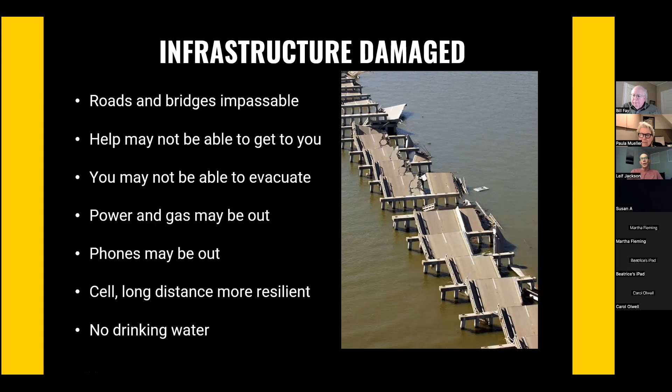And then utilities will be out, water, power, gas. So the things that we are used to relying on a day-to-day basis, we won't be able to. As far as rescue, the same things that are affecting us, the roads being impassable and airports being down, of course will affect rescuers as well. So expecting rescue or even emergency supplies to get parachuted in the next day is unrealistic. Bill talked about having 2 weeks of supplies. I think that's a good minimum. Things will not be back to normal after 2 weeks, but perhaps we'll have a better, more coordinated emergency response by then. And then, of course, I'm talking about retrofitting homes and helping to keep them intact in an earthquake.

So if your home is not livable after an earthquake, where will you shelter? In Hurricane Katrina, it was the New Orleans Superdome, which was overcrowded. There were talks of assaults and rapes occurring. The toilets were not working. There was garbage piled up. It sounded like a pretty miserable place to be. So I would say that if you have any control over your likelihood of being in your own home versus a shelter, do everything you can to spend time in your own home.

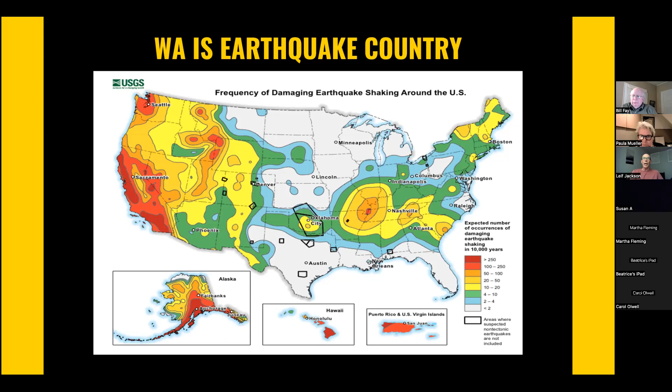And why do we have all those earthquakes? I think we all understand it's because of plate tectonics. In the middle of the Pacific, there are a couple of plates, new earth being formed out of magma and the plates spreading. So underneath the Eastern Pacific is the Juan de Fuca plate moving our way and riding under

the North American plate. And it doesn't just move smoothly. It moves in fits and starts. It kind of grips and causes some pressure and friction to build up and then lets loose all at once. And it can let loose in 3 different ways. And that causes 3 different kinds of earthquakes.

And the one that we've experienced a few of would be a deep slab event. And that occurs, if you can see my cursor here, sort of underneath the crust of the earth, but not necessarily right where the plates are riding together. It has to do with cracking of the Juan de Fuca plate and just sort of a release of pressure there.

And what we think of as the big earthquakes that we've experienced are really not big in the grand scheme of things. We get 2 other types of earthquakes that are going to be much more destructive. Everybody has heard the term the Cascadia subduction zone, and that's when pressure is released all at once right along the actual fault where the plates come together.

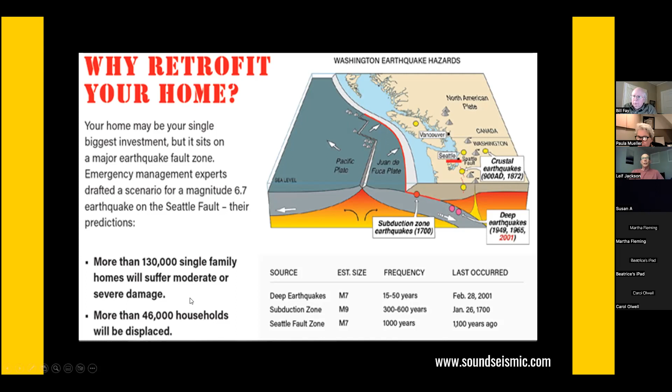We're going to come back to some of these numbers. On the left here, there's information from CREW, the Cascadia Region Earthquake Workgroup, a bunch of disaster preparedness, emergency management professionals and geologists, who got together to use science to figure out what things will really look like after a Seattle fault zone earthquake, and the structural damage will be severe. So we're going to talk about these 3 different types of earthquakes, in order of how frequently they occur, which is also least to most worrisome, least to most destructive.

A lot of us were here for Nisqually in 2001. And occasionally I get homeowners who tell me, my home has been through 3 big earthquakes, so I probably don't need retrofitting. And I try to gently correct them and let them know that their home has been through 3 moderate earthquakes. They're right that there was one in '49 and one in 1965, and then Nisqually in 2001, and those were all a little bit less than a magnitude 7. And our homes survived them almost 100%. And that's great, because that's the frequency and the severity that we can expect.

And this photo here is from Nisqually. I think these are homes in West Seattle. And you can see, while they're brick veneer, these are wood framed homes, just like most of our Queen Anne homes. And really all the damage is that the chimneys failed. So I think we got very lucky. We should not be nonchalant just because we've survived that type of earthquake, though.

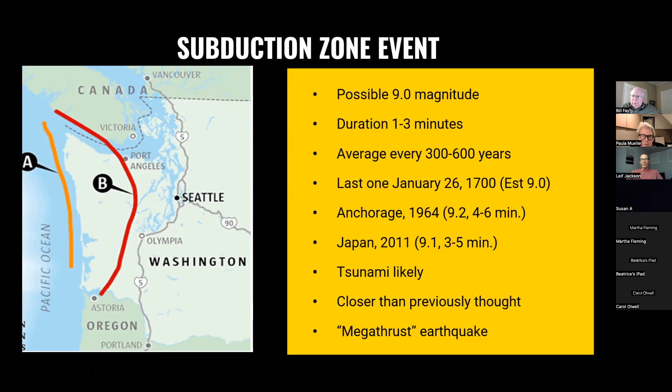This earthquake, the Cascadia subduction zone event, got a lot of press in 2015, 2016, when the New Yorker published an article, and it won a Pulitzer Prize because it had great science behind it. But it was also a little overdone, and some of you may recall some of the overly dramatic language in it. But it was really effective at motivating people through fear to act and become more prepared. And so I did send Kathryn Schulz, the author, a thank you note for helping Seattle and the Northwest raise the awareness here and help us get motivated to become prepared.

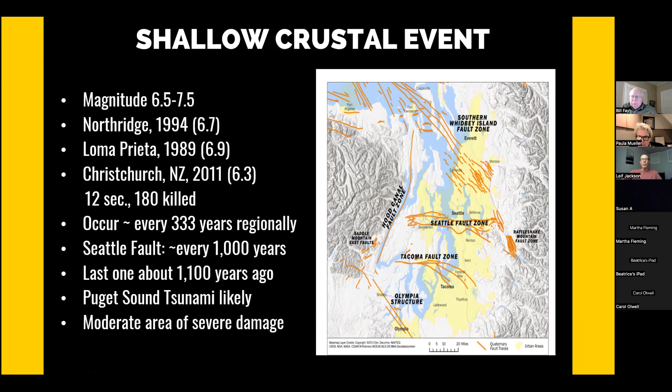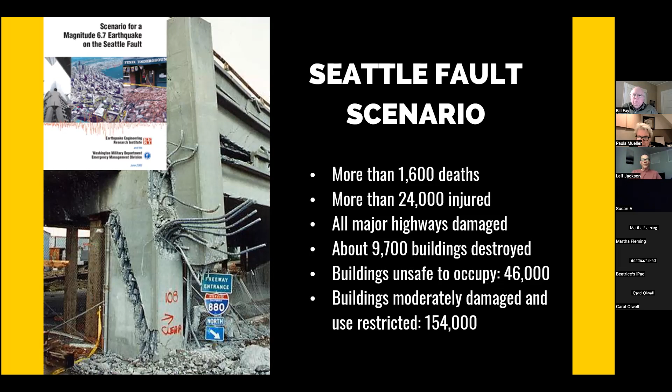So that's pretty striking. The effect on buildings, and that's something that we can totally control. We have the technology to prevent that kind of damage. So, regarding our homes, on Queen Anne we have a lot of homes that were built between 1900 and 1940. And I guess the bad news is that building code didn't require anchor bolts until 1965. Plywood wasn't really used until after that. And so most of our homes were built without earthquakes in mind. The building code just didn't think about them.

The good news is that even though that's true, our wood framed homes perform pretty well in most ways. Single family wood framed homes are one of the two best performing types of buildings. The other one are skyscrapers, which of course are engineered to resist the forces and have things like vibration dampening systems and counterbalances to take care of all those forces. We don't have that. It's just kind of dumb luck that the nature of wood construction and nailed wood to wood connections is this lucky combination of strong and a little bit flexible. And it works in most ways.

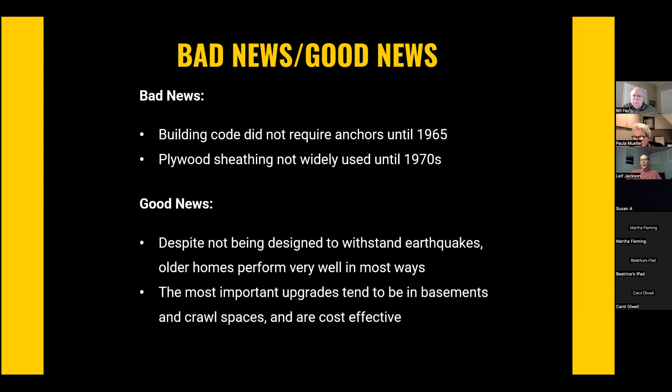In most ways, I say, the lowest level of the home where the force aggregates tends to be the most vulnerable. So it's also good news that the weakest points tend to be in basements and crawl spaces, and those tend to be the easiest to access. And it's a fairly limited scope of work.

This is more Bill's area. We should be prepared in more ways than just retrofitting. You should have a plan for what you're going to do when an earthquake hits. You should build a kit. The old rule used to be 3 days, 3 ways. I think Bill's rule of 2 weeks is a much better standard. And then, getting involved in the communication hub or Seattle's program called SNAP, Seattle Neighborhoods Actively Prepare, or getting certified as a rescue technician. Those are all ways to prepare and make it so that we can rely on one another.

And when you put a kit together, there's a lot more than just food and water that needs to be in there. There are a lot of great resources on here, but things to think about are shoes. They say you should have a pair of shoes upside down under your bed so that you can grab them quickly. And if a window breaks right next to your bed, they're not going to be full of glass, right? Seems pretty easy. If you have kids, diapers, feminine products, garbage bags to put all those in. These are things you may not think about, but they're really easy to put together and have prepared.

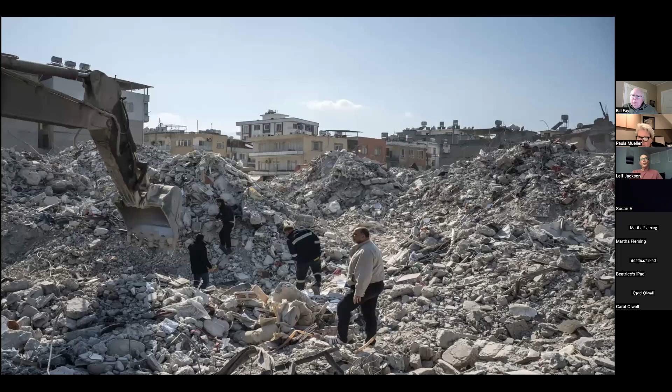And here's a photo from Turkey. This is just in the last 2 weeks. And you can see that some of the buildings were reduced to absolute rubble. They pancaked, and they just came down one level after another, and they are nothing but rubble. There are no air pockets in there. But what's striking is that there are buildings in the background that look pretty much entirely intact.

And what could the difference possibly be? Is it that the earthquake was more violent here than it was a block away? I don't think so. It's that some of these buildings were built to code with the elements built into them or added to them as part of a retrofit that we know makes homes safer, and some weren't. So it can and does make a difference. And you could probably hear the passion in my voice. I think this is a preventable tragedy.

Now we're going to the California homes. These are older photos. You can see this one's black and white. This is, I think, Northridge in 94 or 95. And you can see, like my little line drawing from a couple of slides ago, that bottom layer sort of buckled. This one, right below the first floor framing, everything above it is intact. Everything below it buckled, and that house is like 2 feet over and 2 feet to the left of where it started. And it's a black and white photo, so you can't tell, but that's a red tag. That means that those homeowners are not allowed into the home.

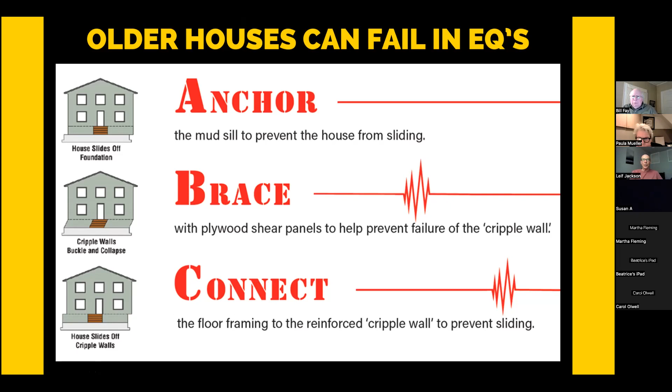So that's kind of the ABCs of retrofitting. It conveniently turns into an actual little alliterative thing with ABC: anchor, brace, connect. So we're going to talk about those in order. Anchoring, a lot of people understand that retrofitting has to do with bolting houses to their foundations, and it does, but that's not all. So where there's room, the way we bolt is we actually drill straight down through the framing,

drill into the concrete, and install bolts. Or what my company uses is these big concrete screws. There are other anchors that are a little easier to install and cheaper, but they're also weaker. So this is kind of my standard. But if you're familiar with concrete wedge anchors or wedge-alls, or epoxy anchors, those are also allowed. We just like these screw anchors because they're so much stronger.

But you can see the size of our tools. This is an impact driver that we use to actually spin these screws into the concrete. The tool that we use to drill into the concrete is even taller than this. So we need a certain amount of room directly above where we're trying to fasten for these vertical bolts to work. Where we don't have room, and here's a house with no cripple wall at all, there's obviously no room to drill vertically here above the sill plate.

The alternative are these side anchor plates. Simpson Strong-Tie is the company that makes all of these, and they work with us retrofitters, and they've come up with hardware that fits our needs. This one in particular is designed because a lot of us have a 2x4 sill, which is 3.5 inches wide, sitting on a 6-inch concrete foundation. That leaves 2.5 inches here. This hardware is designed to reach 2.5 inches and accommodate that setback. So that's the URFP, the Universal Retrofit Plate.

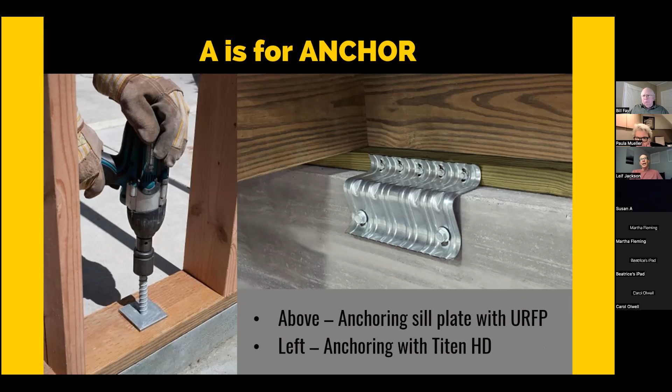So that's anchoring. Another thing tied into anchoring is, mostly we're trying to prevent sliding of the framing on the foundation. But if we have tall walls, or short lengths of walls, the geometry of those wall sections can actually cause them to try to lift up at the corners. And that vertical overturning force, we resist differently.

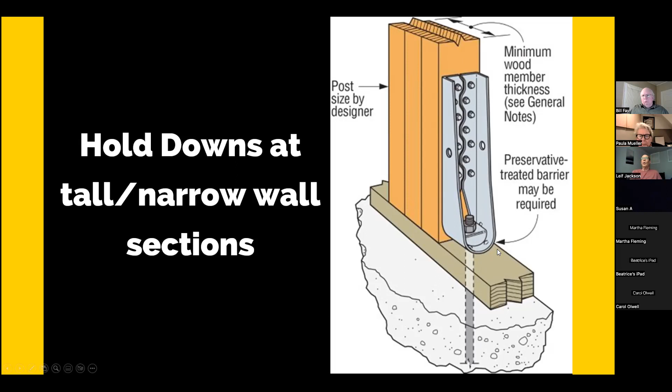We've got these hold downs that, instead of just fastening to the sill, fasten into the studs, or a built up post of many studs. And they anchor more deeply into the foundation in a way that resists withdrawal and uplift. So hold downs and anchor bolts or anchor plates would be the A part of the ABC. The B has to do with plywood bracing.

There are a few other ways of doing it when we have to, but for the most part, the easiest way to stiffen walls is not diagonal braces, it's not steel frames, it's putting plywood on the wall. Plywood is so much stronger than the shiplap boards that most of our older homes have. But plywood is really effective if it's done right. There are just so many things that need to be right for it to be truly effective.

It needs to be the right kind of plywood, structurally rated. Needs to be the right kind of nails, which are called shear nails, which are thicker wire nails than most. The nail spacing is critical. You can see a lot of nails around the perimeter of each plywood panel. Even here, where two pieces of plywood come together, for those to work as one shear panel, we actually need to double up the stud behind there. So there are two 2x4s that are nailed together. And those two 2x4s allow us to put this many nails into it without splintering the wood.

The way we cut the plywood, we can't have any overcuts if there's an inside corner. That can cause a weak place for the plywood to start to tear when it's put under stress. So again, there are a lot of things to mess up, but if it's done right, shear panels are very, very effective at strengthening these cripple walls or pony walls. Cripple wall and pony wall are synonymous terms for this wall above the foundation and below the joists.

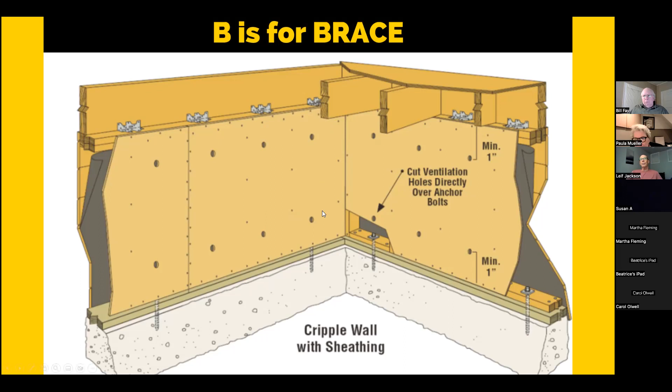And then connect. We know that there's a weak connection where the joists rest on either the cripple wall or the sill plate that they're built on. So there's hardware and a couple other ways of making a very effective connection between the joists and what they rest on. If we do those three things, anchor, brace, connect, our homes are going to be much, much safer.

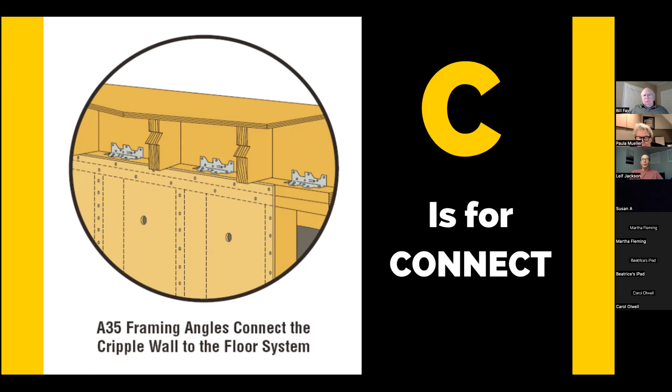The final two things are not really structural things, but we want to make sure that the water heater's strapped with straps that are made for water heaters and strapped to the framing, and that the space behind the water heater is filled if it's not right up against the foundation or the framing, so that it has no room to move.

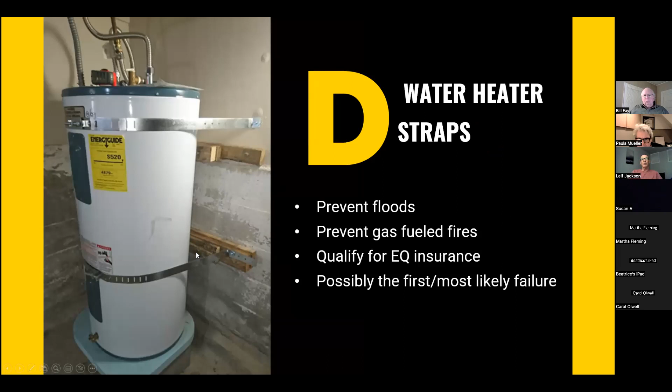Another thing that most of our clients opt for is what's called a Northridge valve. It's an earthquake actuated shutoff at the gas meter. Senses motion, automatically shuts the gas off so that you can't have a gas fueled fire or an explosion.

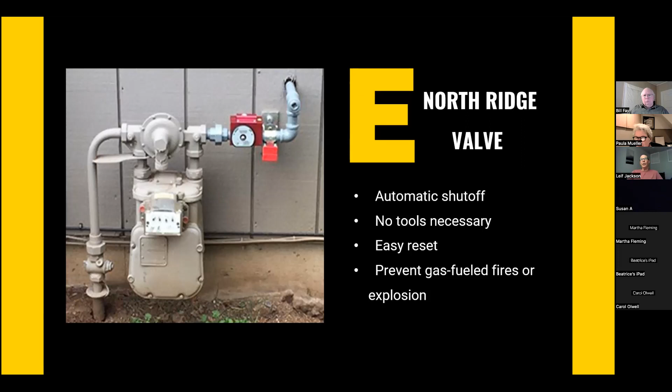Here are some things that apply to retrofits. We always need a building permit, and that's in Seattle and Shoreline and every jurisdiction around here. There are two ways to get a building permit. We can always have a structural engineer design a retrofit and do the calculations and specify the bolt spacing. There is a project, PI stands for Project Impact. That's a prescriptively engineered plan that fits some homes.

And so people wonder what the permit costs. If you're able to use that Project Impact plan, it's about $200. It's more like $500 if you're getting an engineered plan permitted. You could usually do that online. No longer need to go downtown to submit your applications.

This is something to remember if you're doing it yourself, there are 2 inspections on most jobs. The inspectors need to be able to see those bolts and hold downs, and those are going to get covered with plywood, so they need to see them before we cover them. And then they need to inspect the plywood and the way we've nailed it as well. So there are 2 inspections there.

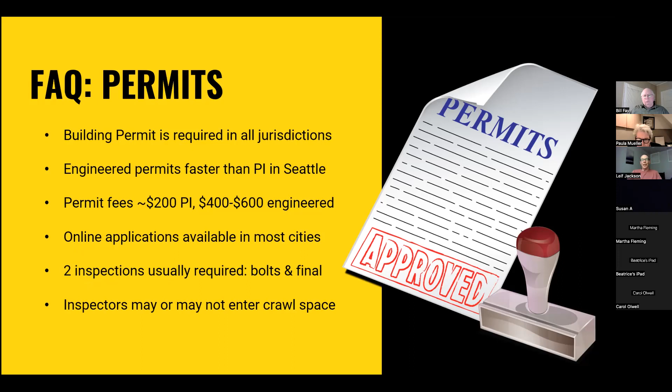Engineering, again, most of our projects are engineered. We find that it's less than 20%, probably closer to 10% of our projects actually qualify for Project Impact. Now, there is a new, hot off the press, version of the prescriptively engineered retrofit plan. I was part of the committee that developed that, and my goal was to make it more usable, try to eliminate some of the obstacles that prevented homes from fitting that plan. So we'll see how well I did on that, but hopefully a few more homes will actually qualify for the standard plan.

Homes that don't: if you have a cinder block foundation, you always need engineering. We do have a way of retrofitting it, but it needs to be engineered. If you have any cripple walls that are over 4 feet tall, that used to be a deal breaker for Project Impact, not necessarily anymore.

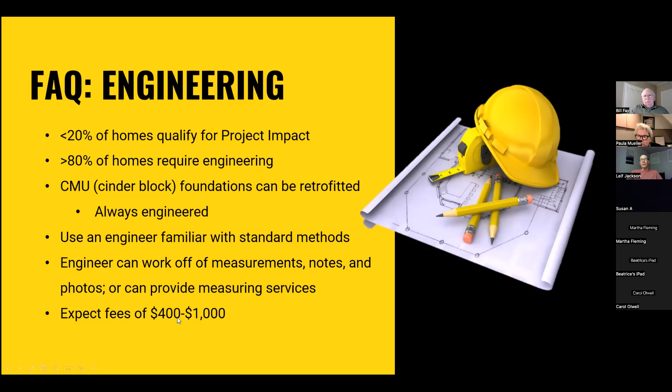Let's see, the engineer doesn't always need to come out. My engineer works off of my notes and drawings. If you're hiring them yourself, expect, I think, $400 to $1,000 is a pretty good range for the engineering portion itself. If you hire a contractor, just do your due diligence.

We all check reviews anymore, maybe Better Business Bureau, but check L&I. You can go online and see what kind of a license they have and how long they've been in business, and if they have any complaints or fines, that is.

You can also do the work yourself. It is not required that a contractor do a retrofit. If you're going to do it, please educate yourself. I have a longer version of a similar webinar on my website. The Seattle Emergency Management actually does these 2-hour classes where retrofit contractors will come and kind of talk you through it.

Whether you're working with engineered or the standard plans, read every bit of it. The details matter. The general structural notes, the little notes next to every part of the details, the plan. Just make sure you really understand the requirements. If you're doing it yourself, you will still need a permit, and you're still likely to need engineering. And remember that first bolt inspection before you cover things, or you will be sorry.

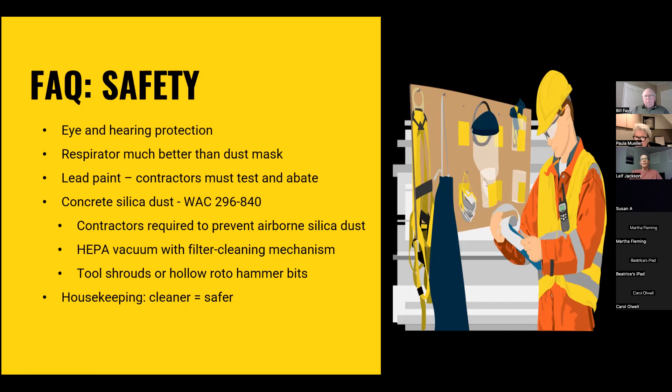Well, what we do is we have a fancy $15,000 system that has a HEPA vac and a filter cleaner and tools that have shrouds on them. So we're actually sucking the dust up before it ever becomes airborne, which generally keeps your house cleaner too, which is nice. And cleaner is safer, and cleaner is more efficient. So just cleanliness and especially sucking up the dust is really, really important.

Okay, everybody always wants to know, yeah, but Leif, how long does it take and what does it cost? And they want to know how much per square foot. And I can't answer it that way, but I can say we have 3 general types of jobs. Either you have a crawl space, those tend to be the simplest. And those are roughly $5,000 in a couple of days. An unfinished basement. By unfinished basement, I mean I walk in there and I'm actually looking at the studs of the cripple wall and there's nothing on them. Those might be a $10,000 project and take a week or so, give or take.

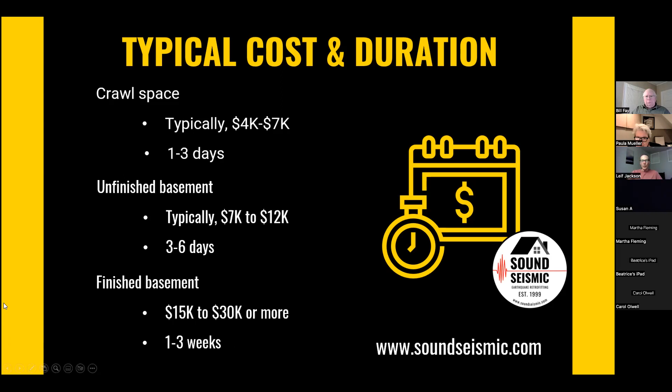If you have a finished basement, a retrofit can still be done. It can be done from the inside or the outside or a combination. But of course, we need to remove the finishes before we can get to the framing and foundation and anchor those. So those end up being, expect a $20,000 project and 2 weeks. So those are kind of the main questions that people ask.

And I just want to sum up and say that it works. I showed you the video. We know that it works. The guy that lent me all those photos from California, he was a FEMA inspector, and he said it was so clear which houses had been retrofitted and which ones weren't when he was doing the census after the Northridge earthquake. There was a house standing and looked perfectly intact, and a house just destroyed right next to it. And the only difference was that one had been retrofitted and one hadn't. So it works, but it has to be done right.

I've seen a lot of sort of retrofits done by probably well-intentioned homeowners and contractors, but they just didn't have the information they needed. And I look at them and realize that those are likely to fail, and I almost need to tear everything out and start over. Let's see. So, if you're going to do it yourself, especially educate yourself. Just make sure that you really understand what you're doing and you're doing it right. If you're a contractor, educate yourself as well.

The idea is that it's lateral shaking that we worry about. And if we do a good job of keeping the perimeter of the floor platform from shifting relative to the foundation, then the middle can't go anywhere relative to the foundation. So it's not a required part. There shouldn't be any stress put on those connections, but it is pretty easy to just put some hardware connectors on there. Some T-straps or what are called post cap hardware, where the beams are supported by posts. That's really easy to do. They could be nailed on, they could be done by a homeowner.

And then there are similar connections, post base hardware that's used for the bottom of the post where it sits on the foundation. And they don't hurt. While I believe the engineers that they shouldn't be needed, why not do them? We generally do.

So I know I'm over time here, Paula. That's okay. If people have questions, now is the time to ask them. So we appreciate your taking time to do this evening. It's great for people to know what's involved and why it's important, because obviously, having a safe place to live and to be for you and your family is probably one of the biggest things that we don't think much about. We just assume our homes are safe, and they aren't always.